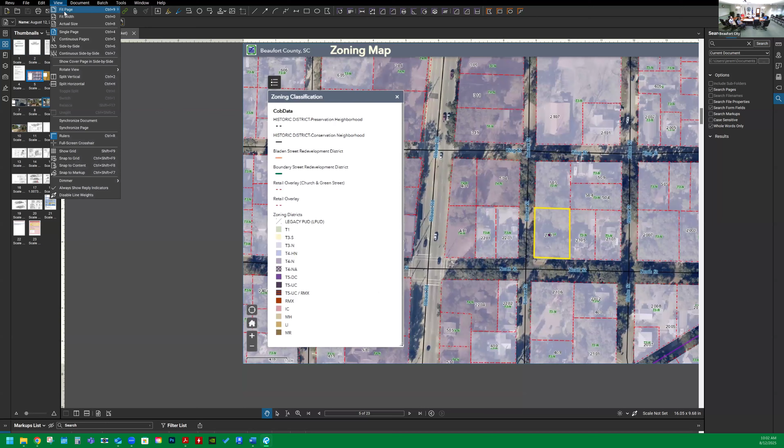We have only one agenda item on today's meeting, which is 2107 North Street, request for various alterations to the interior, but mainly what we're looking at today is also the exterior, including a construction of a carriage house, which would be phase 2. So with that, the applicant for this request is Mr. Benji Morillo with Frederick + Frederick Architects.

So just as an overview, the location at 2107 North Street is the zone T3 neighborhood district, T3N. It's located within what is regarded as the Glebe neighborhood in downtown Beaufort. The lot size is roughly 9,337 square feet, so it's a little over a fifth of an acre. The existing house is about 1,500 square feet in size.

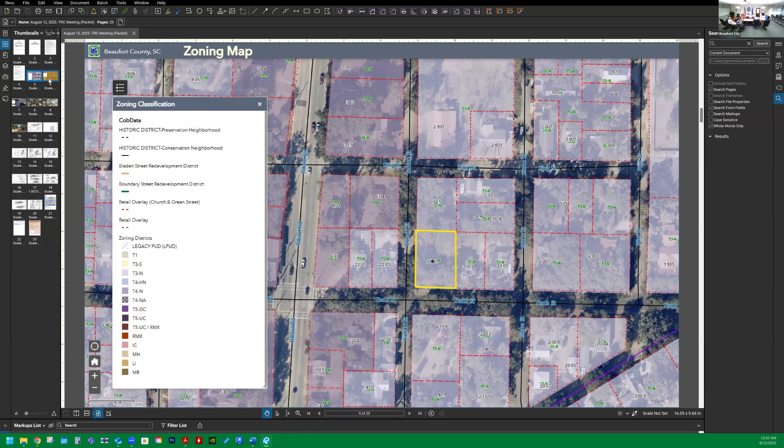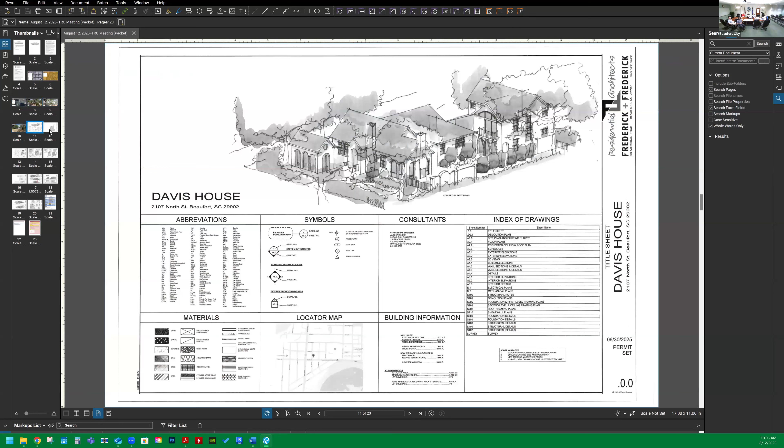So with that, the applicant is proposing, for instance, the existing porch to be enclosed, a front porch to be added as a detached screened-in porch, and adding a walkway, courtyard to the side, walkways all around, I would assume, but Benji, feel free to add on to that. And eventually construction of a carriage house in the rear of the property with an integrated garage. So currently there's a garage that would be demolished on site at the rear, and a new carriage house to be built, with habitable space on the second floor.

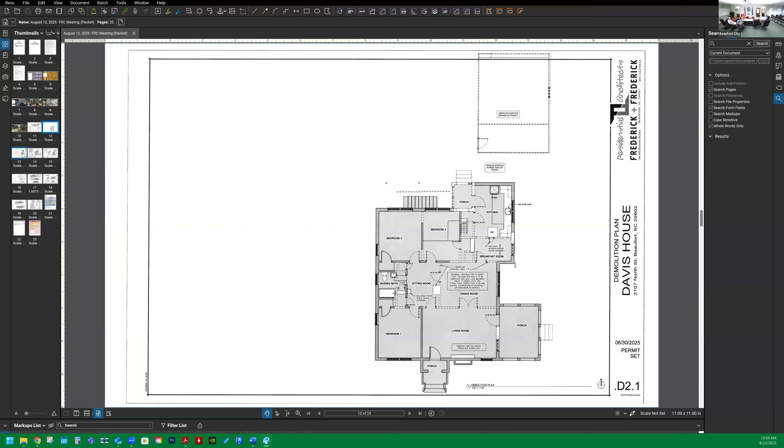Would you like to add anything, Benji? Yeah sure, you want me to present our concept? Okay sure, so yeah, you picked up pretty much everything. So the carriage house would be phase 2. So right now, Eric was applying for the main house, like the screen porch. So we'll apply for the carriage house whenever we are ready for that.

So, I'm just gonna point. Yeah.

On this existing house, there's that back porch and the existing porch down here that we're enclosing. Doing that, we kind of ran out of outside space, so we added this courtyard just outside, and this existing porch now becomes a sunroom. It has all those arched openings that we're gonna put windows and one door to, to come out and go down to the courtyard.

So we're kind of running out of space for a screen porch. We didn't want to put it attached to the existing porch and block some of that natural light that would come in with all those openings.

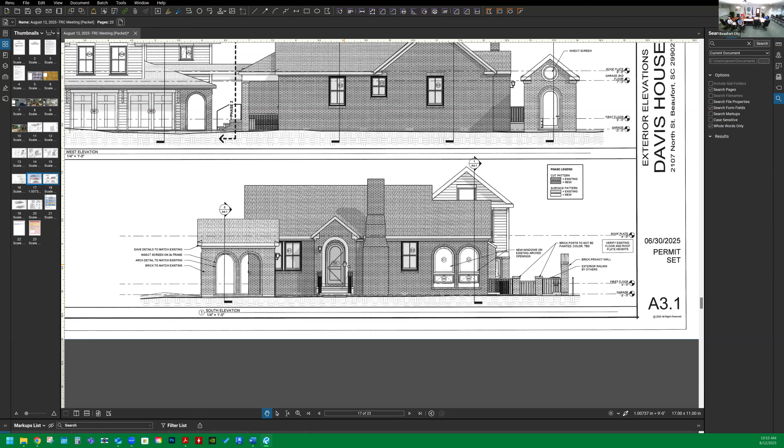Those arches are there already, right? Yeah, those on the right-hand side — that's the porch currently, right? Yes, the openings are there now, but you will put in windows. And we'll match that exact brick detail that's happening on those openings.

And we'll match the eaves of the roof and basically the same shingles and overhangs, and maintain that same white color brick.

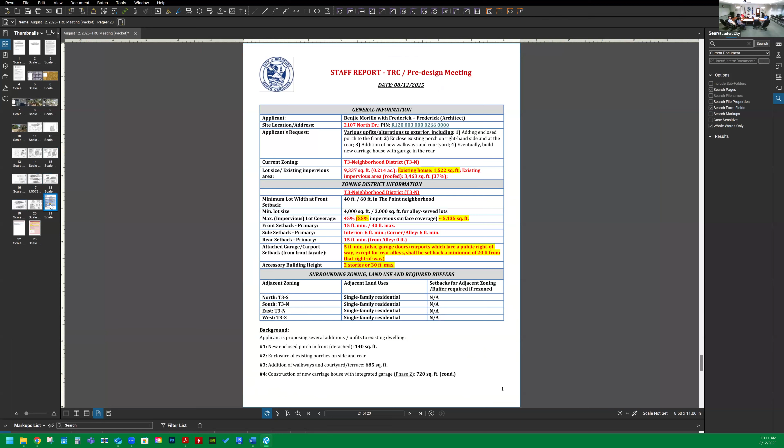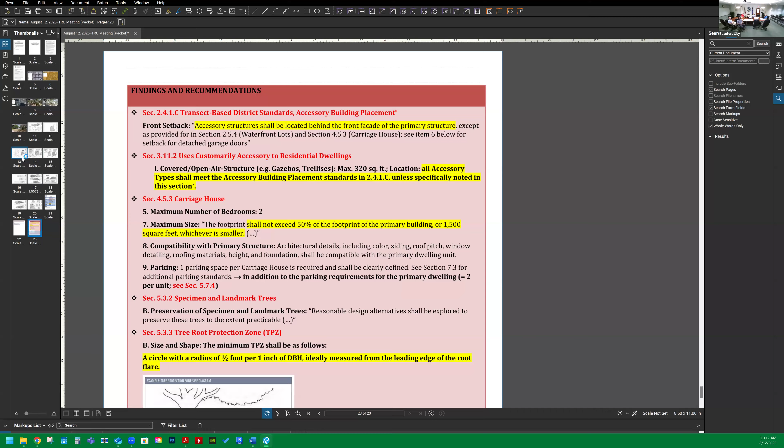Looking at the attached or detached garage and accessory buildings that are planned, for the setback from the front facade we always require 5 feet behind the front facade. But our accessory structures section says accessory structures shall be located behind the front facade of the primary structure. So the detached patio porch you're proposing would be considered an accessory structure per code.

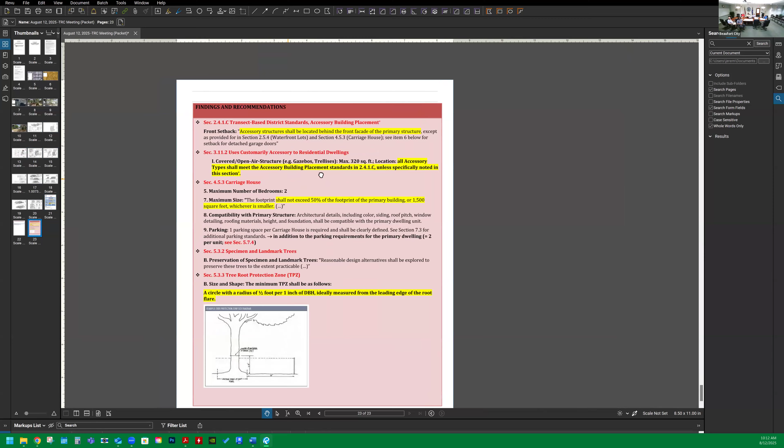So there's a setback requirement when it comes to setting it behind the primary building, per section 241, which might be a concern. Other sections pertaining to accessory structures include section 311.2, covering covered open-air structures like gazebos and trellises, and the carriage house section 4.5.3, which has a maximum size requirement of not exceeding 50% of the footprint of the primary building.

The primary building is around 1,522 square feet, so that's about 750 to 760 square feet at most. For parking, per carriage house, one additional parking space is required, and it needs to be clearly defined where that's going to be put on site, in addition to the parking requirements for the primary dwelling, which are 2 per unit. That brings you up to 3.

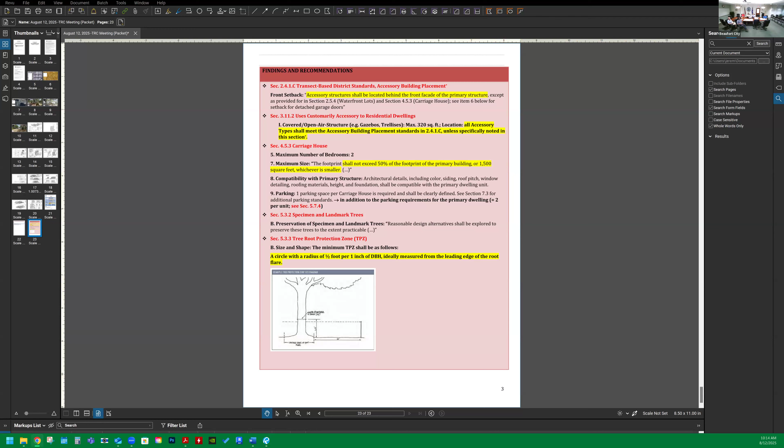Then we have a section regarding specimen and landmark trees on site. There are a couple of live oaks around the sides and front—a 40-inch live oak in front, 20-inch live oaks on the sides and back corner. They are preserved, so the code says reasonable design alternatives shall be explored to preserve those trees, which we have actually done. There are also tree root protection zone requirements for any construction near specimen landmark trees, to protect the root zone from impacts. You can find that in section 5.3.3.

So just to put that out there, I'd like to start with Mr. Skipper if he has any comments. Don't really have a whole lot, since we're kind of early in the review process.

I would like to see the finished floor elevation of that little detached screen porch. I didn't see it anywhere. Are you planning on permitting that structure? Technically you're under 200 square feet, so technically you could probably file without permitting, but I'd recommend it so you have some oversight during the construction process.

The garage and house finished floor elevations were shown. I'm going to consider the garage a detached structure since it doesn't seem to be attached except by that small roof line. In my opinion I don't see the garage as really bearing or really a part of that house, so I'm going to consider that detached—that'll be a separate permit.

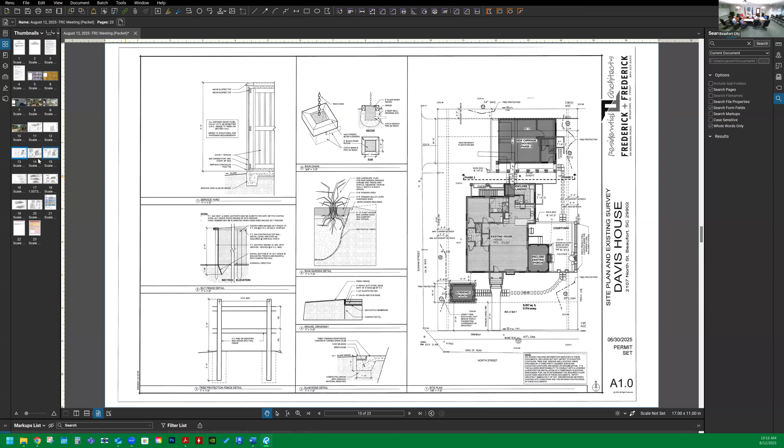Is the generator existing, or is that something that's going to be added? It'll be added. Okay, that's a separate permit. Well, I guess you could—is that part of the courtyard? Yeah, it's in the service yard on the courtyard area. So is it going to be part of phase one? Yes. Okay, well we could probably include that, but just make sure we include it as part of the cost of construction and everything.

The plans look good, so. Anything on the interior that you've noticed? Yes, I mean, like I say, I'll have plan review notes, but I don't foresee any issue really.

Can I respond about the permit? Yeah. So Bruce, when we turned in the permit application for phase one, which included the screen porch, the main house renovation, and the generator, we sort of assumed that would all encompass phase one. Okay, well if that's the case, we'll look at that again, great.

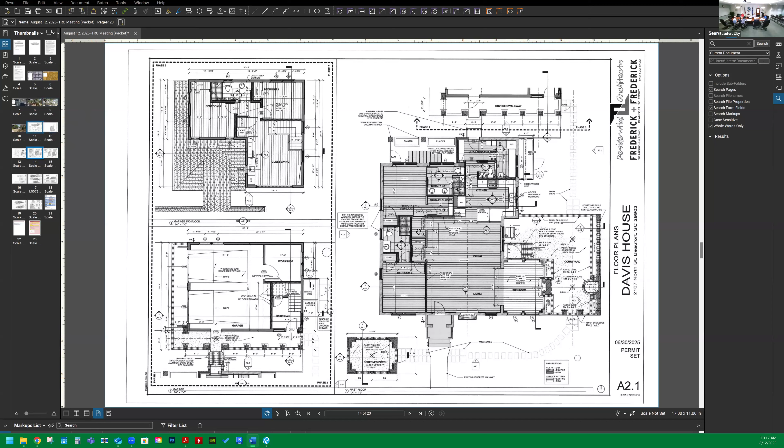Just make sure there's a maximum impervious lot coverage percentage. So if you look at not only roof areas but also covered surfaces, impervious surfaces, that's going to be 55% in that zoning district. So the calculation on the front—there's 37.

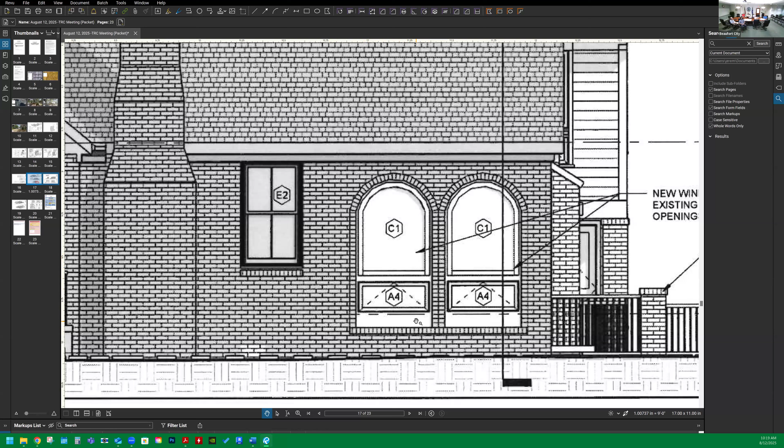And then obviously you're bringing the floor up to inside flush, so what's your plan for this little panel area here? So we were gonna do it like a Hardie panel and paint it the window color. Okay, I think that'd be fine. I think the simpler the better. So it sounds like you're heading that way.

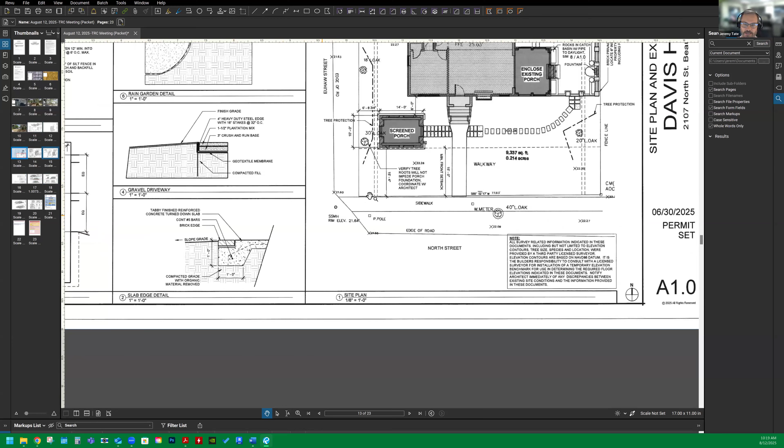That answers everything on the house itself. I think I'm gonna go ahead and jump onto the little screen porch. I think it's a beautiful structure. I think Christopher's covered the fact that the challenge is it doesn't really comply with the code, and the fact that it's an accessory structure that is in front of the primary house.

I think you answered, because I was going to recommend it would look beautiful also on this north side of the courtyard. You might have to realign your access point, but you said you have some camellias or other plantings you're trying to avoid in this area. Yes. It's hard for me to see that in the pictures—are they fairly old camellias? Yeah, they've been there, so they're pretty much established.

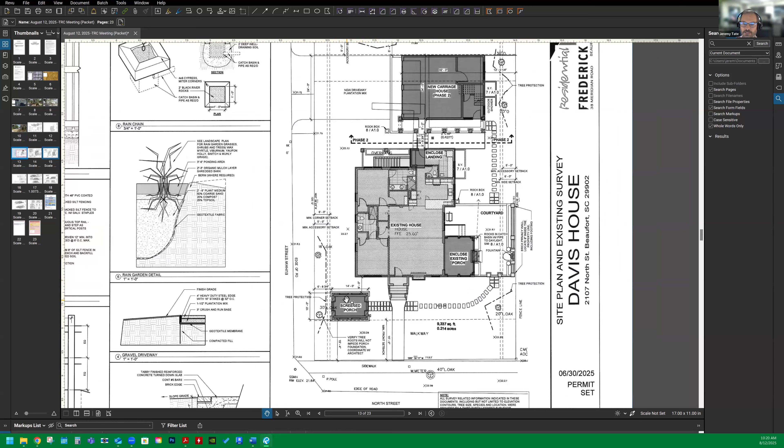I think your biggest challenge is going to be to have something that's approved in this front location. It's a beautiful structure. I would try to look for other ways to not have it in front. If there was another way to fit it here, if you could transplant the camellias—though I don't have a green thumb, so I don't know if that's doable.

The only other solution I had was to somehow connect this to your front. I know what you said about the entry—I get it's a beautiful entry, but I didn't know if there was a way to consider this engaged here, as this element that floats and then somewhat mimics this stair to this side, as long as you still met setbacks. If you attached it, it would not be an accessory structure.

It would just be a screen porch added. But it could still have a similar form, and you could use this as kind of the hyphen connection into the house. Just something to consider, but I do think that's going to be your big challenge—meeting the intent of the code with that accessory structure being detached in front of the house.

So if it was attached by a wall, would that be enough of an attachment to you guys? Well, then basically the prerequisites for detached structures wouldn't apply. So as long as you're within that front setback, which you are, you wouldn't have to bring it behind the front facade of the primary structure, since that would make it part of the primary structure—that wouldn't apply anymore.

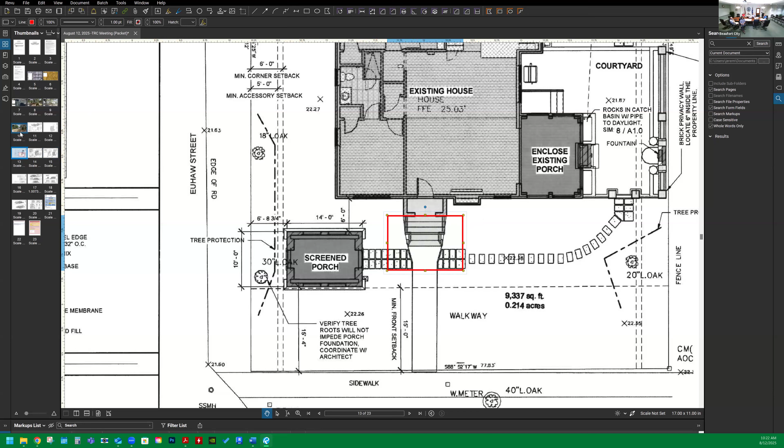So as Jeremy said, if you could attach it to that—what is that, a bedroom there in the front left? If you attach it somehow to that and incorporate it with that front door and stairs, attaching it into that corner to make it like a front porch, a screened front porch attached, then I think that's probably more doable than having it as a detached accessory structure. To keep the form simple, I was just proposing they attach it to the front of this gable entryway.

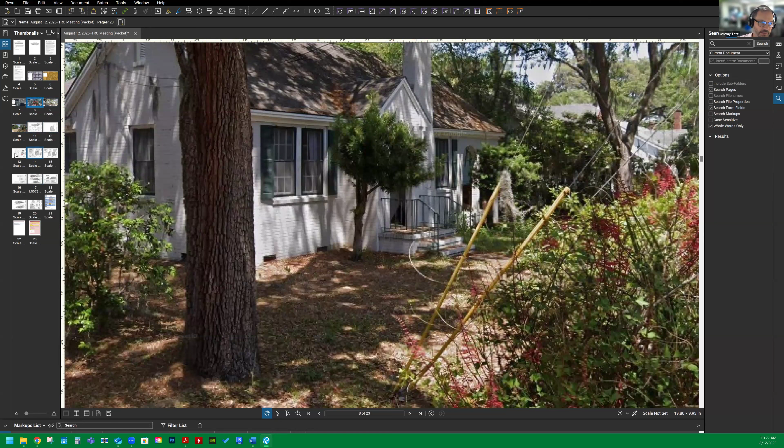So it would still sit—let me see if I can get back to that plan—it would still kind of sit in front and you'd still have some gardening landscape. You wouldn't be impeding that window necessarily, and of course you've got a chimney over here. The only thing about that I'm not crazy about is you have to go through a screen porch door before you go through the actual front door.

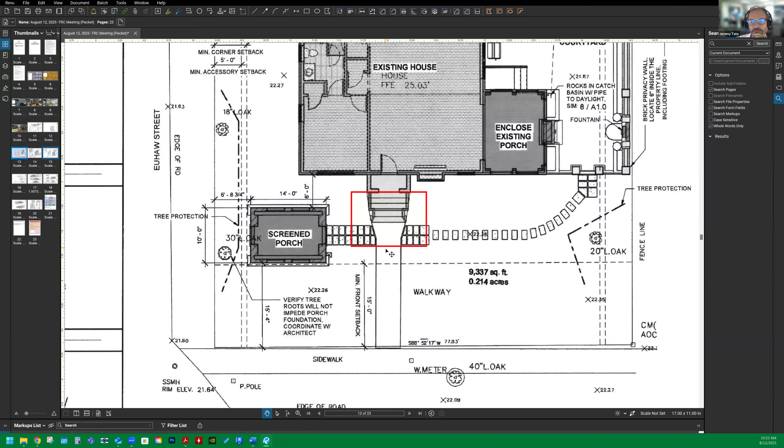But yeah, we could certainly talk about it and discuss it. Bruce, would you say from a building codes perspective, connecting with just that wall would be sufficient for you to consider it? I would say that'd be definitely a part of it, if you put it over that set of front steps like that.

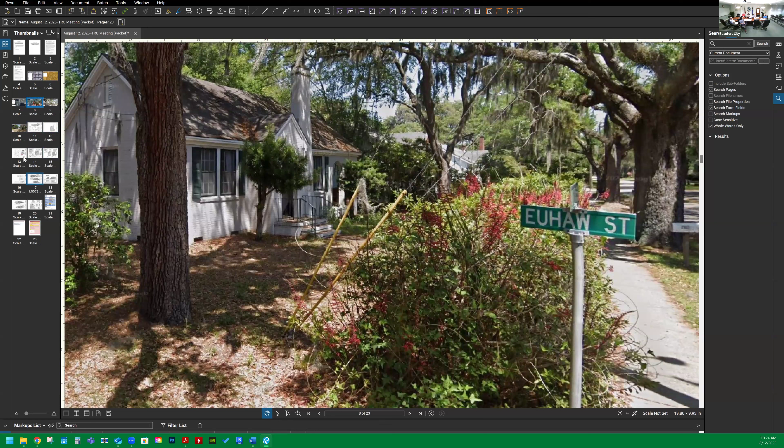How would you attach it, like just a roof? Well, as far as I'm concerned, they attach by foundation and all. What you were saying initially, like just adding a separate wall to it? Well, basically like back here in the back, like a garden wall. Yeah, so if you go back to that plan, if we do a garden wall, maybe it comes down here, and maybe even have an arch, or keep it where it is but attach it visually from the outside with that.

I think I'd be willing to buy it. I mean, it's just a screen porch, it's not like it's a bedroom or a kitchen or something. Yeah, like a brick arbor or something in between so you could walk through, just to make a connection. I'd be fine if Bruce, if building codes is fine with that interpretation, I would be too. Because again, it is a good structure and it does make sense, kind of getting around that relatively strict code requirement.

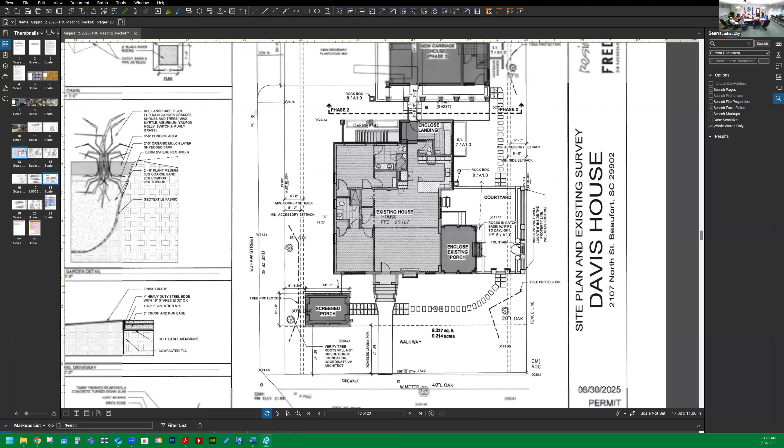Similarly, just to add on, I have some comments here too touching on the carriage house. My initial comments were to discuss the detached or attached nature of it. But since Bruce also clarified that a walkway alone wouldn't consider it attached, I'd be fine with considering it a detached ADU so that you can maintain the accessory structure setbacks of 5 feet instead of complying with that 15-foot main house structure. So at least with the carriage house, I'm fine with that. And from a building codes perspective with the screen porch, if we can consider that attached, then I don't see any reason why we couldn't.

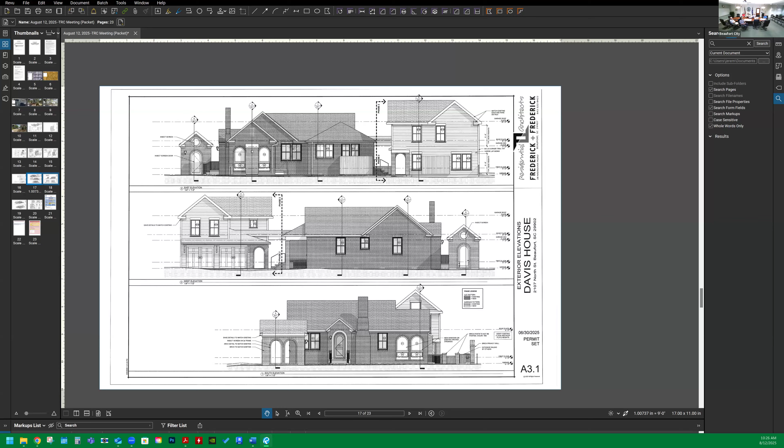What is the overall height of the carriage house in feet? Hey Benji, that's one of my comments. I set the scale on this and measured it. This is going to be close, but I think the ridge of the main house to garage level was a consistent measurement. It's like 21 feet 8 inches or something like this, and this was just about 24 feet. I wondered if you could just decrease the pitch of the roof with the goal of trying to get a foot to 18 inches off the height, which would put it within 10% of the front house.

I wouldn't lower any of your floor heights because you're already kind of minimum there, but if there's a way to reduce the pitch of that roof.

We're trying to match the pitch, but what does it need to be? Well, I think if you could get it within 10% of the height of existing, there's no code requirement for that. I know this is not the historic district, but within the historic district there's a lot of talking points about compatibility and trying to get within 10% when you're doing an addition or an actual separate structure subordinate, and it needs to be subordinate to the front house. I think you're in a very great historic adjacent neighborhood, and if you can find any way to creatively reduce the visual scale of that carriage house, that would be encouraged for sure.

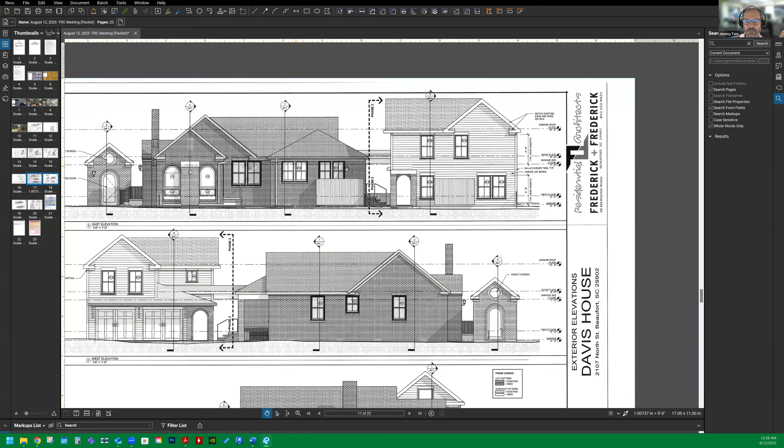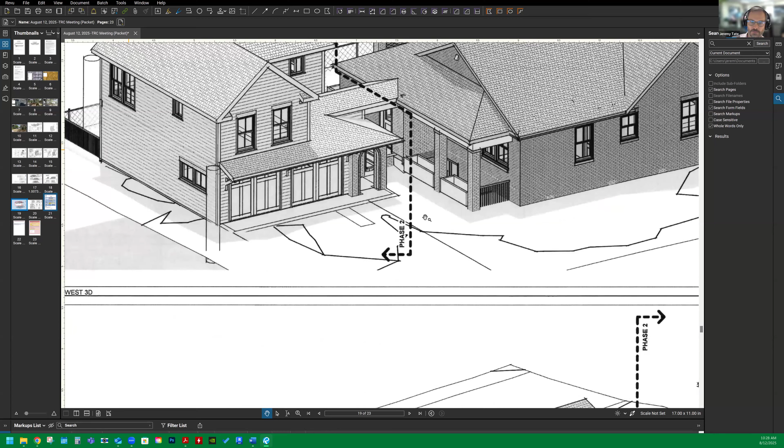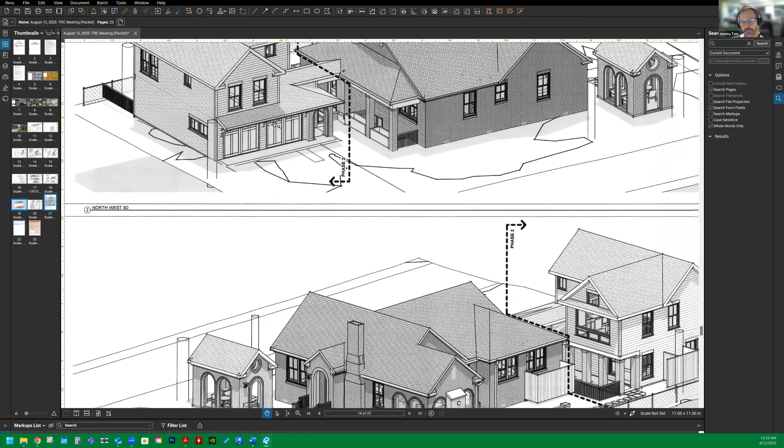You're showing some brick columns here, and it's probably better to see it from your 3D visual. I think I like the brick because it ties back to the house, but what begins to bother me is the way it terminates on this side with the arch, and then terminates against that garage, with siding from here all the way back around to it on this side. I didn't know if it's better to just eliminate the brick altogether and make that part of your Hardie trim package, or if you want to keep it as a transitional element, extend that brick at the first floor all the way around back to this point, then take this horizontal band around until it transitions as needed at this porch, letting it go from brick to siding. Does that visually help reduce the scale, and does it help tie the addition of the carriage house to the house to some degree? And of course color is going to help too, so the color on the house being maintained and whatever color you do here would also help.

Are there any questions for Jeremy? No, I think that makes sense.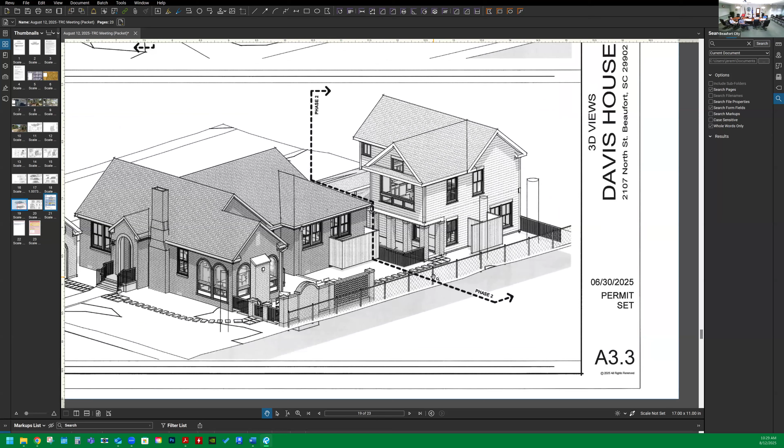We were trying to have that carriage house. At first we had it all brick, but we were trying to make it like a secondary structure while tying into that main house. So you mentioned bringing some of that brick in there. We're also trying to keep the costs down, so we're just trying to limit the brick where it made the most sense. Adding that brick band on the whole entire first floor area might bring costs back up.

We're phasing this out because of the cost, so we'll look at it when the time comes. But is that just a recommendation, or would that be a requirement? From my standpoint, it's a recommendation, because you're in the T3-N zone, but since it's a carriage house, that's really the only part of chapter 4 that applies. It's just that section that talks about compatibility, so I think give it some study and see where that goes.

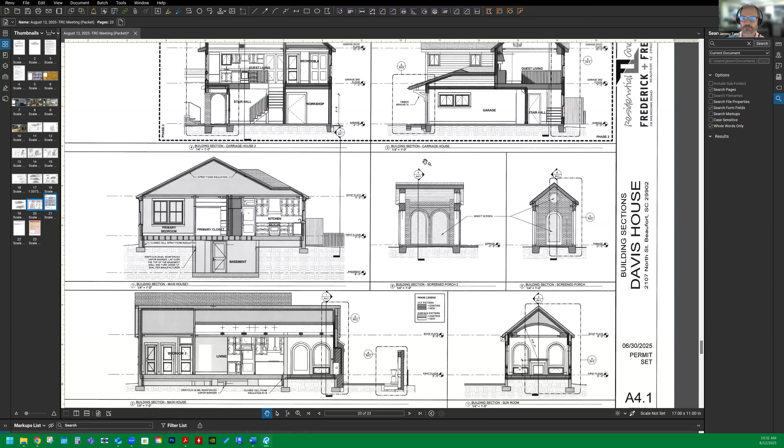I did have one more thing I just thought about. It's minor, but it relates to the carriage house. The pitch of this roof coming in at that window seems tight and seems like a very hard thing to flash. So consider that pitch, or the height of the window — if you can lower it, give yourself about 6 inches below that window, you'll have less maintenance long term.

Yeah, no, that makes sense. Thank you, Jeremy. Thanks, all right, I'll turn it over. Thanks, Jeremy. John, I just have one question.

Is this going to be a primary residence, or is there potential for leasing or renting rooms out? Al, correct me if I'm wrong. Yeah, I can answer that. This is going to be a primary residence. Right now we live in Leesburg, Virginia, and the idea is that in about a year or two, when this is finished, we're going to be selling our property there and moving down to Beaufort full time. So the idea, from the money standpoint, is that second phase of the carriage house was so we'd have somewhere to stay while that's being built. And then the idea is just to have something — this is going to end up being a 2-bedroom house.

So the idea is that with family and friends, we wanted to have a place for them to come. And I like to toy around in garages, so it's nice to have a bit of a place for projects and things like that going on. That was the idea for the size of the garage. I don't have any more questions.

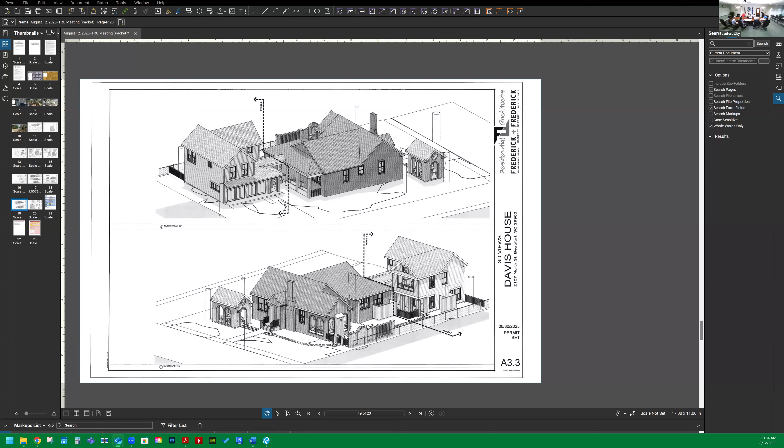Well, there were some protection measures in there, right? You had some tree protection — what is that? Yeah, so that's like a fence, a tree protection fence.

My recommendation would be to get a certified arborist to make sure you're complying with the tree protection requirements. All that information is found in section 533 of the code.

So the arborist can tell us if we can do any of those items. Exactly, if you get a good arborist, they should be able to make sure that's being met. That's all I have to add.